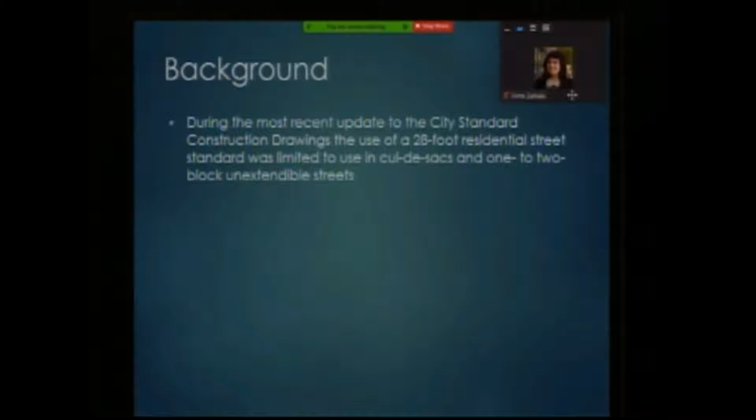The Planning and Zoning Commission has recently, over the last year, been working on an update to the city subdivision code, trying to promote more innovative and compact development typically seen through planned unit development projects, but without all the upfront costs it takes to go through a PUD. The Planning and Zoning Commission is promoting 2 new alternate development forms permitted by right within the subdivision code. One focused in a clustered format, for situations where a property has steeply sloped areas, floodplain, or other sensitive areas. This model would allow you to reduce overall lot size and increase common open space to protect those sensitive areas while getting a slight lot yield increase, providing a financial incentive to do that.

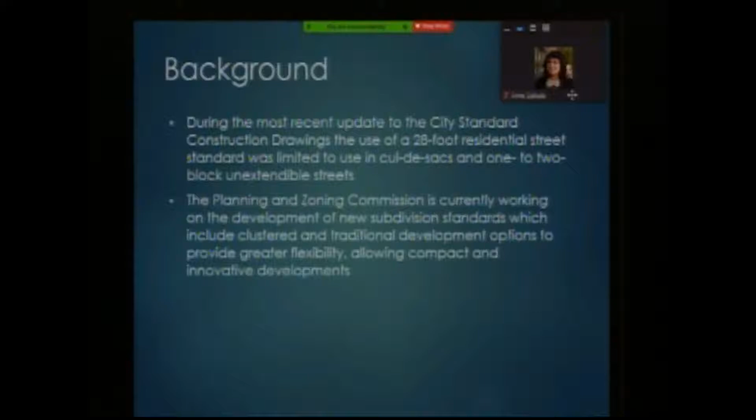The traditional option is really promoting what we consider to be the more traditionally alley rear-loaded lots, so you end up having somewhat longer and skinnier lots that are rear-loaded and accessed off a public alley. Same process there - the lot sizes would be reduced as otherwise allowed in that zoning district. Common open space requirement would increase with the goal of providing a little bit of additional lot yield in the development, to promote more developments using that traditional format.

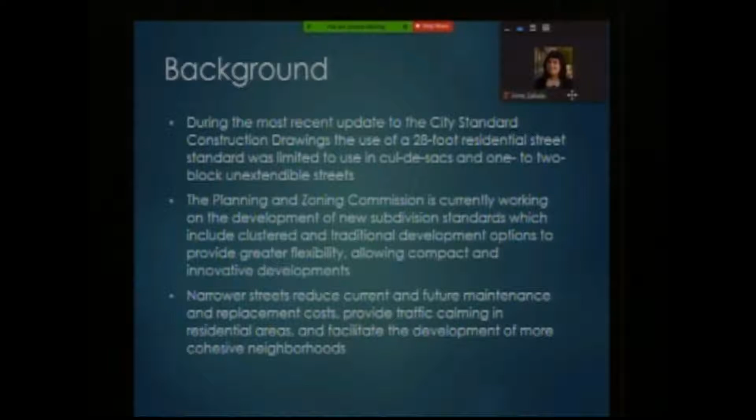Narrow streets oftentimes reduce both current and future maintenance and replacement costs, provide traffic calming in residential areas, and help facilitate the development of cohesive neighborhoods. That was kind of a focal point of the discussion at the planning and zoning - if they're trying to promote this more traditional neighborhood development, having a very wide residential street through the middle of it may be detrimental to that effort.

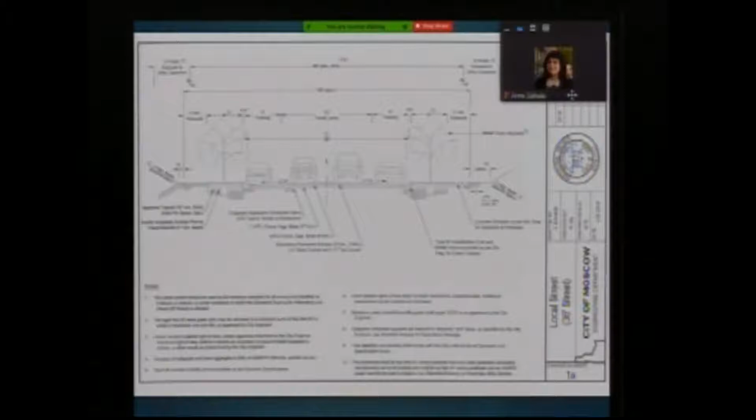So as I mentioned, this is currently the 36-foot local street standard, which is 36 feet from face of curb to face of curb, 2 travel lanes and parking on both sides. The 28-foot standard is quite a bit more compact - 28 feet from face of curb to face of curb with parking on one side and the 2 travel lanes. Both standards include tree lawns of at least 8 to 10 feet in width, as well as 5-foot sidewalks in residential areas. This was that footnote, as I mentioned, that was added to the 28-foot standard, stating it would be limited to use in those circumstances.

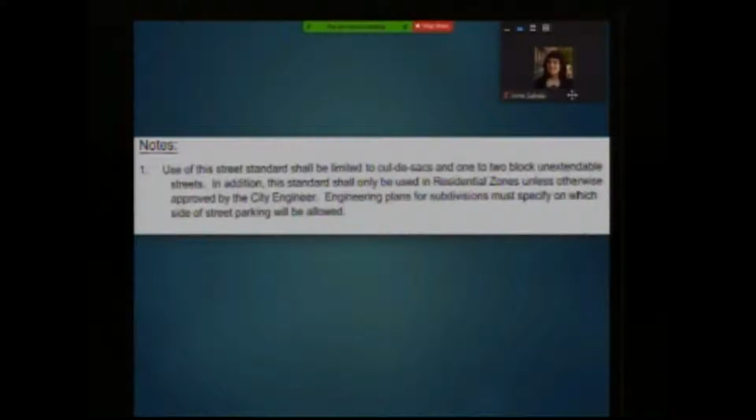Planning and Zoning Commission has been working on those updates, as I mentioned before. Traditional would allow that neighborhood with alley streets loading from the rear, and the conservation subdivision development, that cluster development, will allow for preservation of those sensitive areas. It's contemplated that both of those new development standards would benefit from utilizing a more narrow residential street, and so Planning and Zoning Commission concluded they felt the 28-foot standard would be most appropriate in that circumstance, and therefore would like to encourage the allowance of the 28-foot standard in more developments. So they are recommending removing those limitations on the 28-foot standard.

This was also reviewed by operations to look at how much the city would actually save long-term in operations and maintenance of a narrower roadway. So over the life of that roadway, this anticipates you would have 3 applications of a slurry seal, 1 AR chip seal application, 1 grind and overlay, and then ultimately, once the road and the base is no longer serviceable, a reconstruction of the roadway at the end of its life.

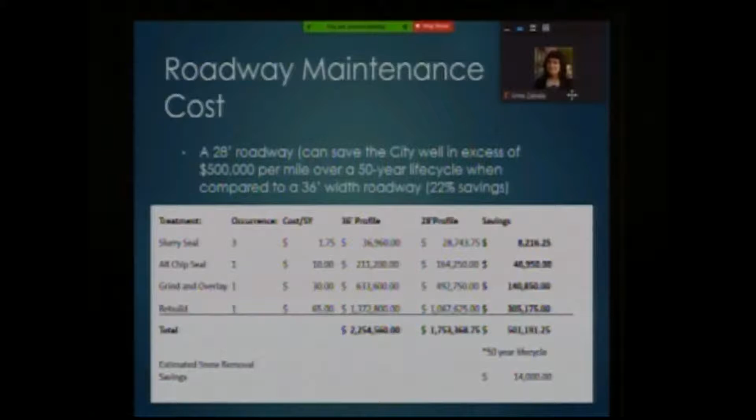Narrow roadways help reduce speeds and calm traffic. More often than not, where we hear complaints about vehicle speed are those larger roadway sections. It's just that as people feel more comfortable, feel less obstruction on either side of the roadway, they naturally feel it's safer to go at a higher rate of speed.

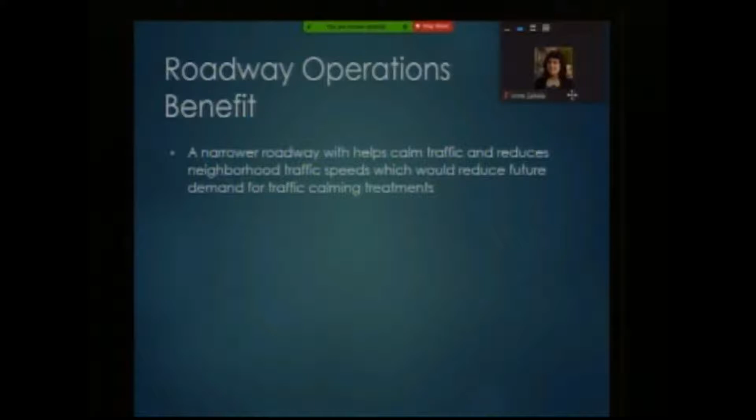The council is also aware that the city jointly funded a regional housing assessment, and housing affordability and attainability is a significant concern within the community. All development costs get passed on to the future home buyer and owner of the lots on each side of the road. So as we looked at a 22% reduction in the long-term maintenance and operations of that roadway, we would also see a commensurate reduction in the initial construction cost, which could potentially help address housing affordability challenges within the community.

There are also environmental benefits that could be received. Greater impervious, or lesser impervious surfaces, results in reduced stormwater runoff. We reduce the heat island effect due to that asphalt area being reduced. We also have reduced impacts during construction due to less material and asphalt and oil required for the roadway, as well as future maintenance activity. Additional land, less land, is required for that roadway and right-of-way, which helps reduce the footprint and increase efficiency of land development and conservation of land from development as necessary.

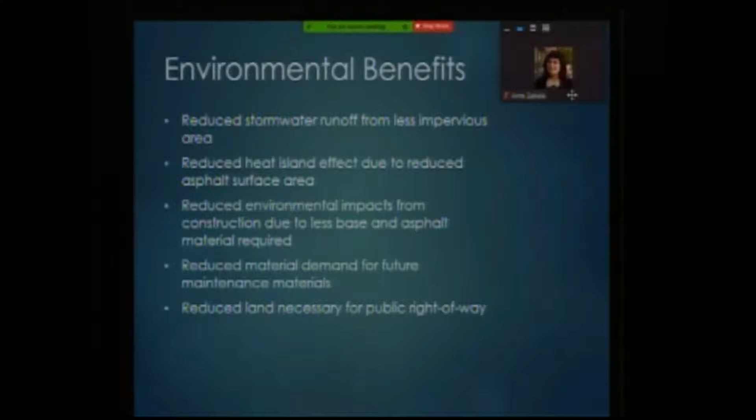So the proposed changes before you this afternoon include a simple update to the table of contents, but really the primary change would be to retitle the 28-foot street standard as our local street standard and the 36-foot street standard as our alternate local street. It still would remain in our street standards. If there was a development in a particular location where the Planning and Zoning Commission and City Council felt more on-street parking would be beneficial, that standard would still be there. But we'd be communicating that, for most single-family residential developments, the 28-foot standard is our preferred roadway for them to implement in their design.

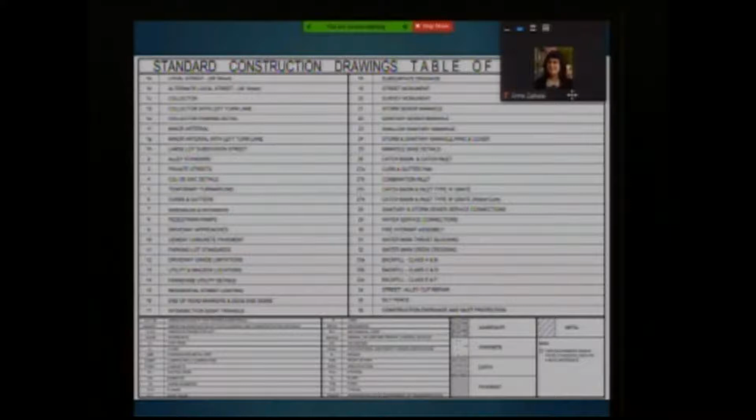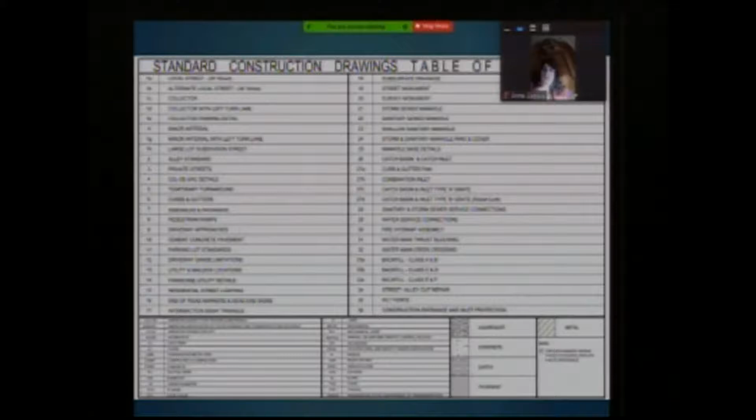We would remove and modify that footnote from the 28-foot standard to remove that limitation in use. The drawings and full standards are in your packet, but really the changes are in the first 3 pages. Under the table of contents, we would change the titles of drawing 1A and 1B for the local street and the alternate local street. The 28-foot standard shown here would then be titled our local street, and that footnote would be modified to read that this street section shall be used as a minimum standard for all streets not classified as collector or arterial.

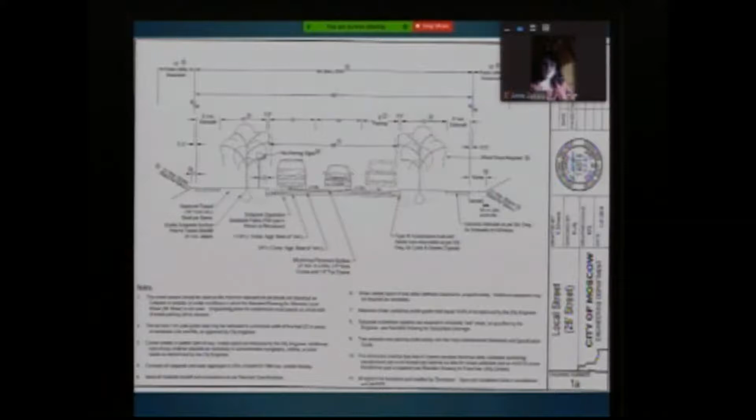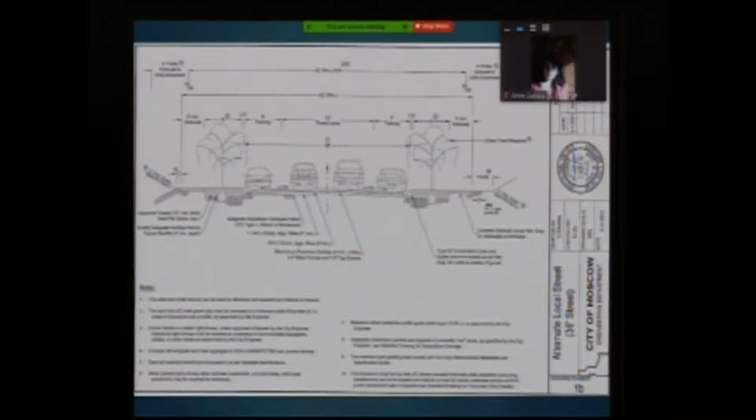We do have different standards for roadways of higher volume and speed, so this would only apply to local residential streets within a subdivision. The street would be used in those instances where it's not classified as a collector or arterial, and where the alternate local street, or the 36-foot street standard, is not used. The 36-foot standard would then become our alternate local street—still an option for a development if they want to provide additional on-street parking, but we'd really just be encouraging the 28-foot standard use.

The Planning and Zoning Commission initiated this request for consideration and is interested in seeing the change occur. Both operations and engineering staff have reviewed it and also recommend approval based on those operational and long-term maintenance benefits to the city. The Transportation Commission reviewed the proposal over the course of 2 meetings, and at their October 8th meeting, they recommended approval of the change to the City Council.

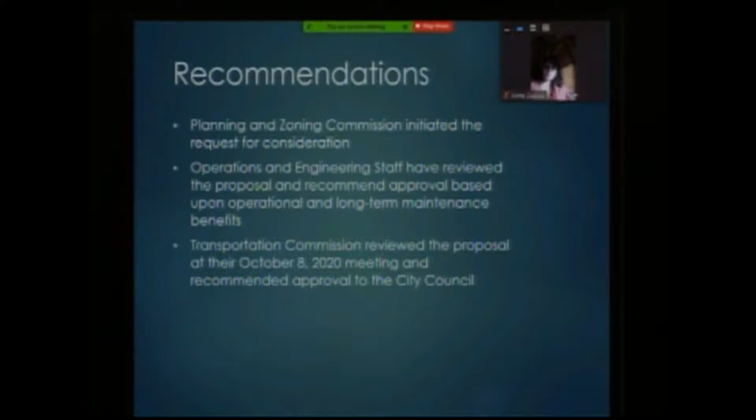So staff's recommendation this afternoon is for the committee to recommend approval of the proposed amended standard construction drawings and associated resolution, which will be in the council packet coming up, or to provide staff with further direction. With that, I'd be happy to answer any questions you might have.

Art, do you have questions?

Just some clarification perhaps. You indicated the new proposed 28-foot cross-section would be used for cluster development, which makes great sense there, but also for development with backloading through alleys with garages pointed off of the main street. But would the 28-foot street width also be incorporated for, I suppose, the more usual quarter-acre house on a lot type area as well? Correct.

It'd be promoted as our preferred. So we would have conventional, traditional, and clustered as the three subdivision forms. Conventional would just follow the standard minimum lot size in the zoning code, whether it's the R1 9,600 square feet or 7,000 square feet in R2, with the standard parkland dedication requirement. Clustered would allow a smaller lot size with a corresponding increase in common open space area. Traditional would be similar, but would require alley development and rear loading, allowing narrower lot widths, smaller lot areas, and again commensurate open space increase. We would promote the 28-foot standard in all three of those development forms.